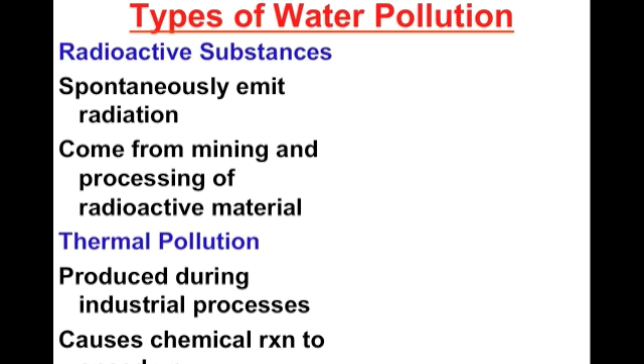This can cause chemical reactions to speed up and adversely affect populations in those watershed ecosystems. One thing it can do is decrease dissolved oxygen. As you can see in this table, as temperature increases, dissolved oxygen within the ecosystem goes down, and dissolved oxygen is very important within marine ecosystems.

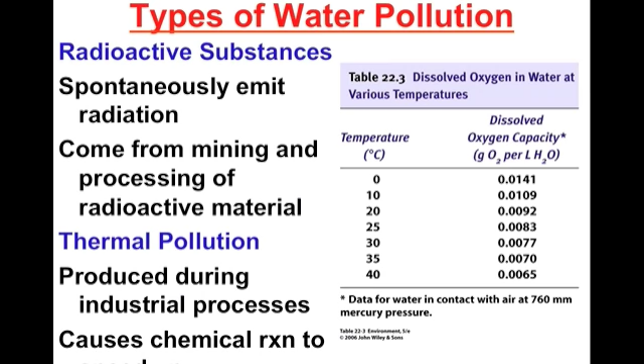Moving on to water quality today - it's really negatively affected by two types of pollution. Water pollution is broken up into point source pollution, like a cyanide spill - pollution that occurs through dumping of pollutants out of pipes, sewers, ditches, or other specific sites such as factories or sewage treatment plants. The main thing to focus on is where it came from - if it came from a specific spot, that's point source pollution.

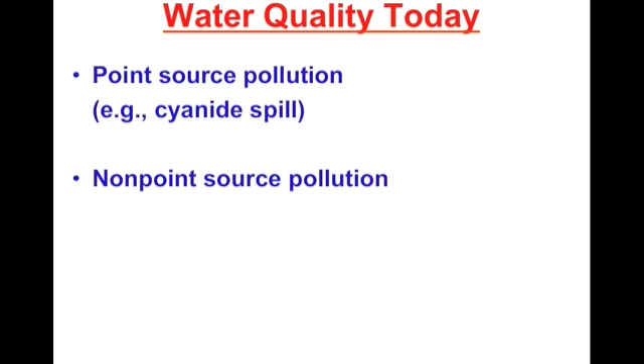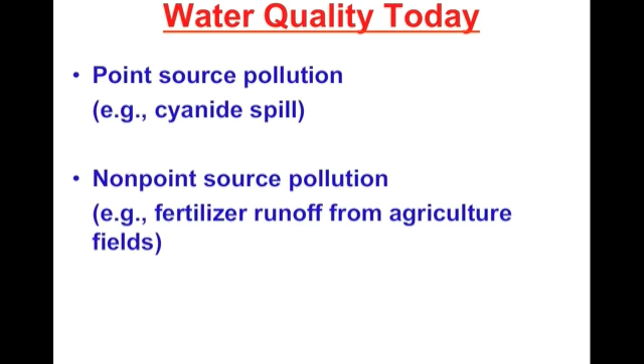The other type is non-point source pollution - land pollution that enters bodies of water over large areas rather than through a single point. It occurs when precipitation moves over or through soil and is carried to a wetland or other body of water. An example is fertilizer runoff from agricultural fields, carried off through precipitation which joins up with other waterways, like the Mississippi watershed. Water pollution from agriculture causes 72% of all water pollution.

Chemical pesticides leach into soil and then come into water. We already talked about the problem related to fertilizers extensively. Soil erosion from fields and rangelands can also occur, causing sediment pollution in waterways.

Municipal water pollution includes urban runoff. Urban runoff from cities and streets is often worse than sewage, as it contains salt from roadways, untreated garbage, animal waste, construction sediments, and traffic emissions. This type of waste is usually treated at a sewage treatment plant.

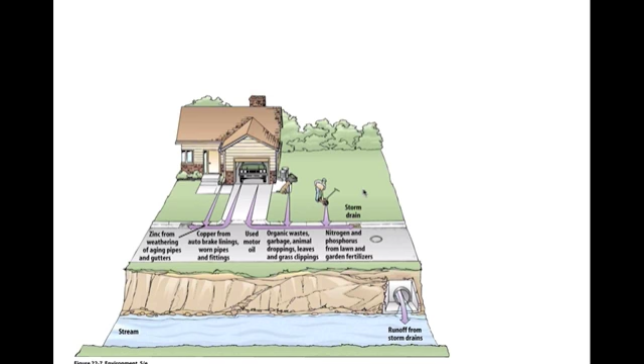However, sometimes in cases of large storms, sewers overflow. When a huge storm hits an area, the sewer fills up, and once it's full, it can't go anywhere else. So the storm drain overflows and water goes essentially everywhere.

Industrial water pollution - the problems really depend on the industry. Food processing leads to high BOD, biological oxygen demand. Paper mills can lead to toxic compounds and sludge. Many U.S. industries now treat their own wastewater, however a lot could be done in terms of improving that process.

One thing scientists are focusing on right now to improve that process is green chemistry, which aims to minimize environmental impacts and was developed to combat pollution. Green chemical practices include using fewer synthetic chemicals, using silicon-based cleaners instead of hydrocarbons, and replacing harmful synthetic cleaners with less harmful alternatives.

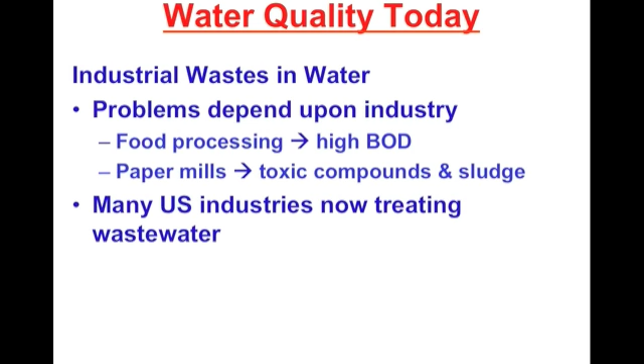On to the issue of groundwater pollution. This chart gives a good representation of different ways pollution can enter groundwater, such as nitrates and pesticides, which can seep into the ground and eventually end up in your aquifer. Things stored underground, like gasoline storage or septic tanks, eventually crack or leak, and the chemicals stored inside start to seep down into the groundwater.

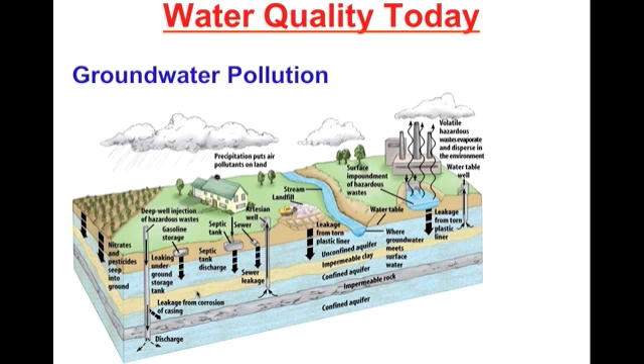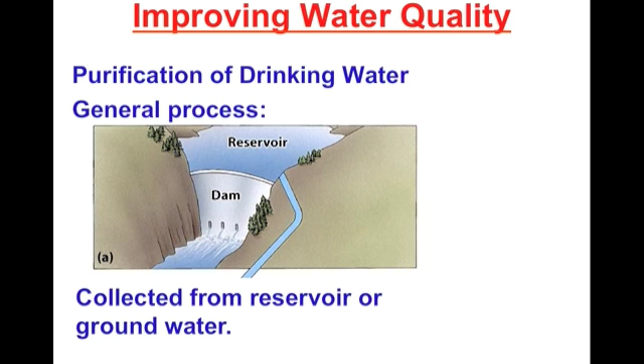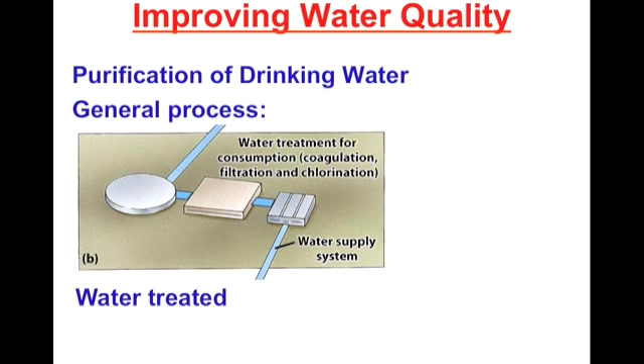Now on to the purification of drinking water. It's a general process - water is collected and stored in a reservoir, acquired either through reservoirs or through groundwater using a well. After it's acquired, it goes to water treatment for consumption, where it's filtered and chlorinated, going through the process of purifying it.

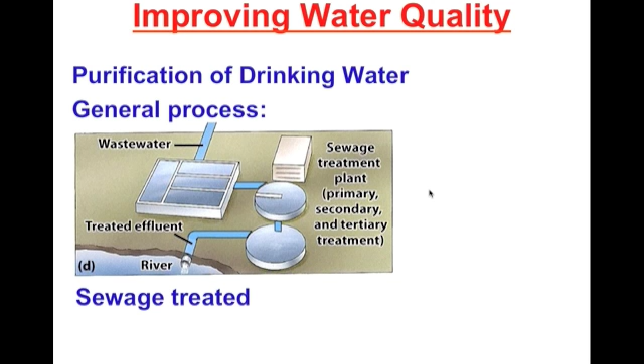After it's purified, it's used in homes, factories, and businesses, and then it comes out through sewer lines. These sewer lines all eventually meet up and head out to the sewage treatment plant. The wastewater is treated through primary, secondary, and sometimes tertiary treatments in order to clean the water, and this cleaned water is then allowed to re-enter waterways.

Related to the purification of water, there are a few issues, and they mainly relate to chlorine and fluoride. Chlorine is a chemical added to water in order to treat and kill bacteria present within the water. It sanitizes water by killing disease-causing organisms. The real downside is that chlorine use can be linked to birth defects, cancer, and other health issues. However, most scientists consider the lives saved through chlorine use more of a benefit than the cons, so it's a process that continues to happen.

Same with fluorination, or fluoridation - it refers to adding fluoride to water, which is something found in your toothpaste. It's used to fight tooth decay, so the water you drink helps keep your teeth strong. However, critics say it may not be the safest practice, so a debate continues on whether it should be continued. Still, a lot of states, even as recent as 10 years ago, are passing laws related to adding fluoride to water, so the trend is more to add than take away.

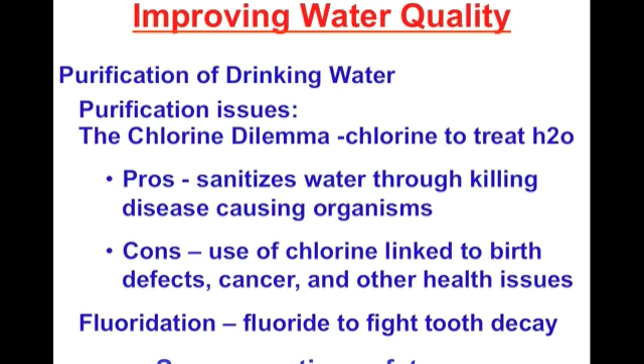As far as municipal sewage treatment, raw sewage water enters a sewage treatment plant and has its sand filtered, usually by use of a screen. There's a primary sludge filter - these are both part of primary sewage treatment. What they're really trying to do is get any sand out, and then remove any really big chunks of matter, which is then digested.

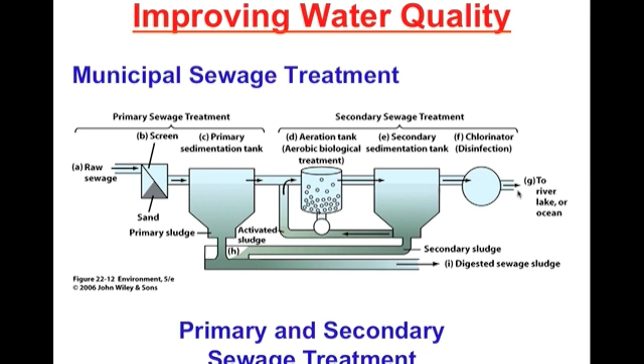Anything that makes it through primary sewage treatment moves on to secondary sewage treatment. In secondary treatment, bacteria is used to further break down and treat the water. The sediments are then allowed to resettle, all in hopes of removing more sludge from the water. After that's done, the water is treated and disinfected using chlorine, and then allowed to re-enter lakes, rivers, streams, and oceans.

As part of municipal sewage treatment, this chart shows the effectiveness of different treatments. Primary treatment really gets rid of sewage solids and starts getting at pathogenic bacteria - pathogenic meaning disease-causing organisms. Secondary treatment starts having an effect on dissolved organics and viruses, but it doesn't really get at nitrogen or phosphorus.

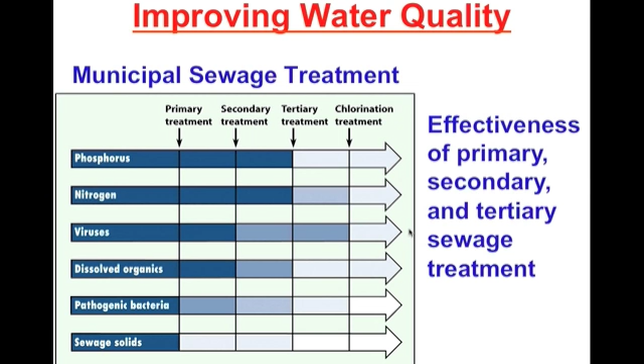Tertiary treatment is an additional treatment that can be done. It's typically used in more rural areas or water-poor areas, because where water is scarce, they use tertiary treatment - the goal wouldn't be to put it into some watershed, but to actually reuse it for drinking purposes. That really starts to get rid of viruses, nitrogen, and phosphorus. Chlorination really finishes off the process, eliminating anything that's left in the water.

With municipal sewage treatment, some major problems associated with wastewater treatment involve the disposal of sludge. We have all this going on in the removal of sludge, but what's done with it once we have it? It can be used as fertilizer, but there could be heavy health risks, as heavy metals present within it can cause lead poisoning and mercury poisoning, so it can be a bad practice. Other times it's dumped into the ocean, though that's now banned. So currently most of it's being dumped in landfills, ending up at your regular trash landfill.

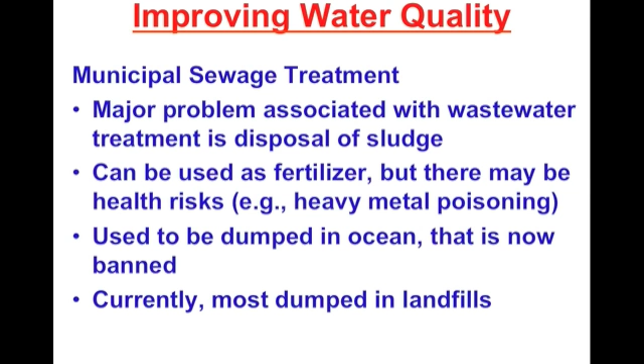Moving on to individual septic systems - here we have a septic tank being illustrated. Household water goes into the septic tank. Scum, which is mainly oils, along with a few other things that make up grease, separates at the top, and bacteria is used to treat those things and break them down.

Wastewater forms a layer underneath the scum, and this wastewater is allowed to drain out into a drainage field. At the bottom there's the settling of sludge, and about once every 5 years you're supposed to get your manhole cover taken off and the sludge removed, because it's just building up at the bottom of your septic tank. Septic tanks, at least individual ones, are more used in rural areas as opposed to urban areas, so I doubt this is anything you all have come across.

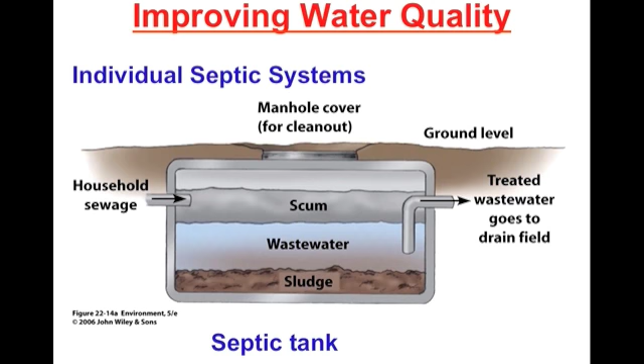This is how it would look hooked up to a house. Here wastewater from the house goes into the septic tank, and these are then allowed to drain out into the drainage field.

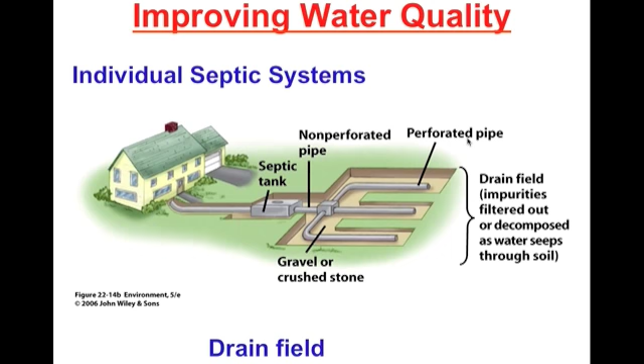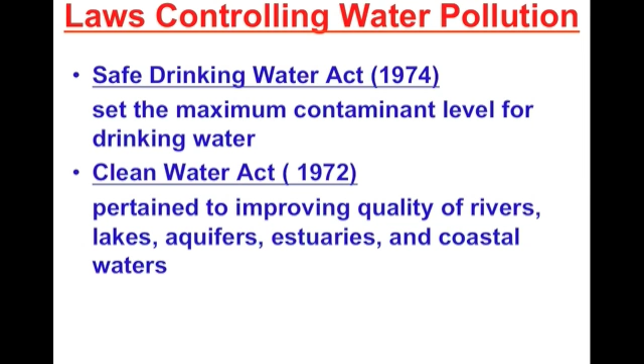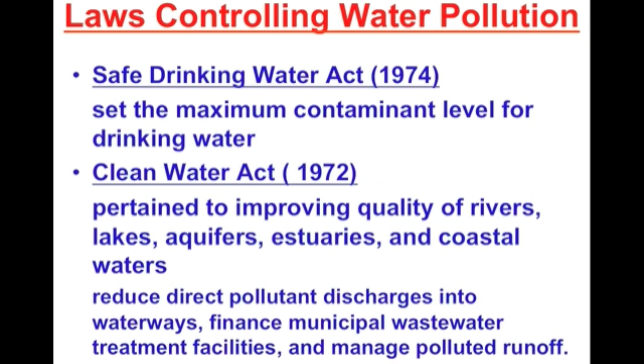Moving on to laws controlling water pollution. The Safe Drinking Water Act set maximum contaminant levels for drinking water - that was passed in 1974. The Clean Water Act was in 1972; it pertained to improving the quality of rivers, lakes, aquifers, estuaries, and coastal waters. It reduced direct pollutant discharge into waterways, financed municipal wastewater treatment facilities, and managed polluted runoff. Some examples would be related to the Great Lakes - I have some links you can click on.

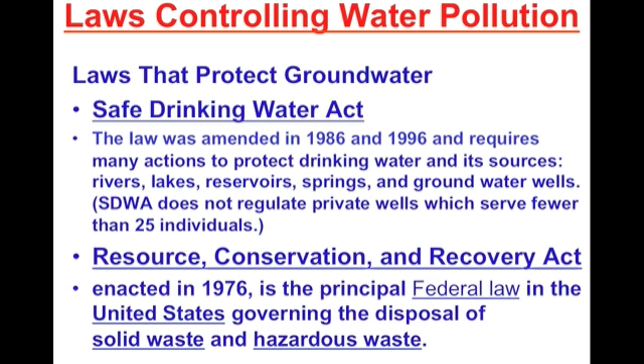Laws that protect groundwater: the Safe Drinking Water Act was amended in 1986 and 1996, and many of the actions were done to protect drinking water at its sources - rivers, lakes, reservoirs, springs, groundwaters, and so forth. The next was the Resource Conservation and Recovery Act, enacted in 1976 as a principal federal law in the United States, and it governs the disposal of solid waste and hazardous waste.